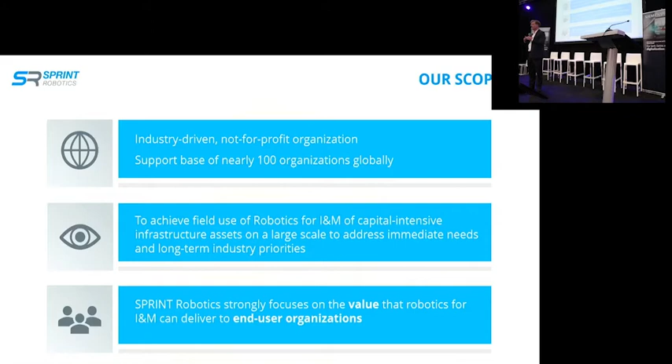I think one of the key success factors and defining features of SPRINT Robotics is that we are an end-user driven organization. That means we always start with the added value of robotics from an end-user perspective, and we're not interested in the technology per se. It's all about the added value that the technology can provide.

And that added value has multiple dimensions. Of course, there's the safety element in it. Hydrocarbons and people in their vicinity in principle are not a very good idea. So if we can take people away from hazardous areas, that will drive safety, and robotics can play an important role there. In the front of everybody's mind these days is also environmental performance improvement by doing things more cleverly.

In this session there's also a presentation on on-stream tank robotics. If you can leave a storage tank in service, that will reduce the environmental impact of your inspection and maintenance program, and that is important these days.

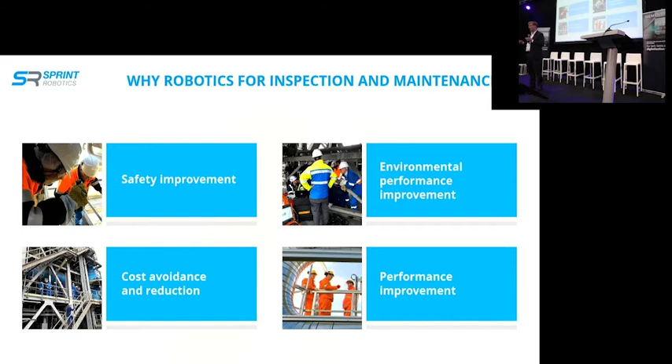And then, of course, there's the cost element of it, which has two components. One is driving down the cost of doing the inspection and maintenance in the first place. The other element is the increased uptime of your assets, which will result in more availability and thus more added value out of the assets that you have.

Many of our support organizations, more support companies, are global oil and gas majors and terminal owners. We decided that since this is a global industry, we needed to be global.

So very soon after 2015, we started to expand also to North America. So we have a North American chapter. We have an Asia Pacific chapter these days operating out of Singapore. And we are at the cusp of opening up also a South American chapter, which was supposed to happen in 2021, but due to COVID, it was delayed by a year.

This picture is sort of central to the way we look at how you drive robotic implementation. The only way to accelerate it is if you get alignment in the whole value chain. Simply put, there needs to be a business case for everybody involved in the implementation of robotics, because if one of the actors in the value chain doesn't have a business case, then basically your implementation breaks down.

So we've put this picture together to give you a bit of a feel for how that works from our perspective. We start from the right-hand side, which is the end users, who actually have the actual needs for robotics and for inspection and maintenance. But they outsource most of the work to service providers, who in turn are dependent on technology providers to provide them with the technology they need.

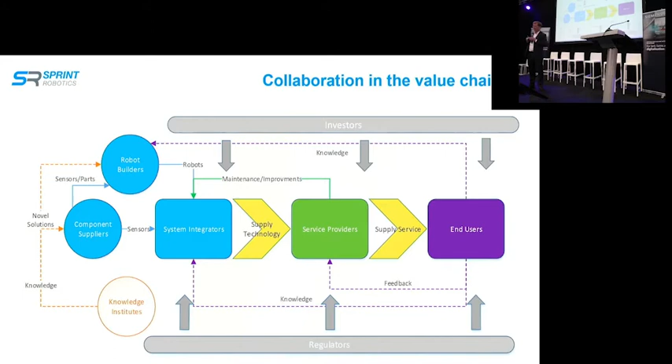For instance, if you're flying drones, there are regulations you need to comply with. There are all sorts of safety regulations, and technical standards you have to comply with. So the whole regulatory field is important, and the better we can get the message across to all actors in the value chain, the more rapidly we'll be able to make the change.

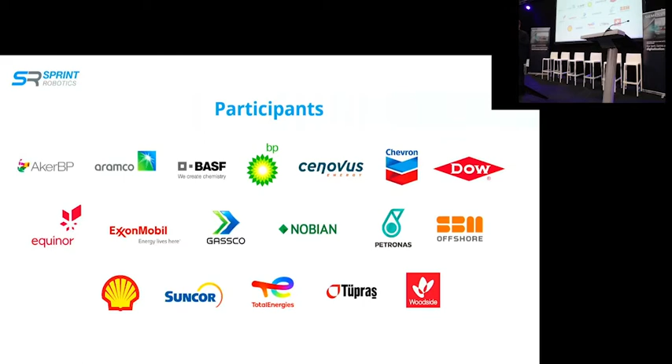So we do it with our full participants, mostly oil and gas majors who support our organization and drive the agenda. They are the ones who decide what we spend our resources on. Then we have a very large group of technology and service companies, about 80 of them, that make use of our services and our networks to help accelerate this. I think this is really a matter of raising the tide for all of us, so that robotics becomes a base case and not the exception it often is.

So what do we do? We're really focused on the deployment side of things, not so much on over-the-horizon research. Our working areas are really about how we can get robots accepted and usefully applied. That means we do it on an asset-focused basis, not with action groups around drones or ground-based robots or something like that. No, we focus on certain types of assets.

So we have the action group around storage tanks, which thinks about useful applications for robots in storage tanks, whatever they may be. We do the same for pressure vessels and process piping, and then we have a group that focuses on what we call remote operations. That covers applications where you want to do surveillance, inspection, or maintenance tasks without humans in the loop, doing it at minimum in a remote-controlled way.

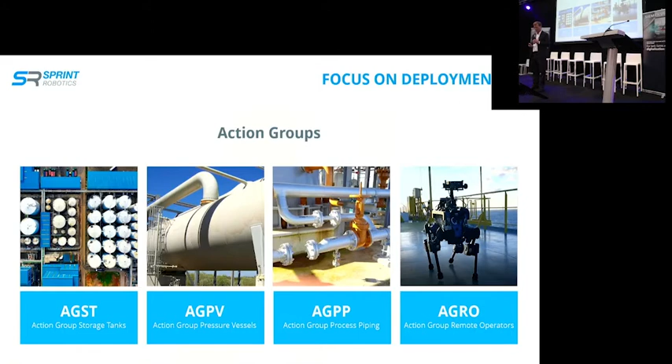But often also in automated ways, and that's where the new generation of spots and quadrupeds now becoming available play a role. Then there are some new areas where the capabilities of robots are becoming so strong that we felt we needed a special focus. One element is the cleaning and fabric maintenance side of things.

Robotics started very much in our industry as devices that collect data, almost like roaming sensors. But we see more and more that robots are becoming capable of actually executing tasks, which in the manufacturing industry is what robots have been doing from day one. On the service side of things, that's only now coming into its own, with cleaning tasks, coating tasks, and those kinds of things.

Clean energy, of course, is on everybody's mind. The margins on clean energy production are way off what they are in the oil and gas industry. So we see that industry becoming highly efficient in executing inspection and maintenance at a much lower cost. We'll see more of that in the oil and gas industry too, in our opinion, because those funds will have to be used for clean energy initiatives as well. So clean energy is certainly something very much on our minds.

Funding, as I showed in the diagram, is really important. And of course data is front and center to everything we do. So we're also looking into what AI can do to help us in this respect.

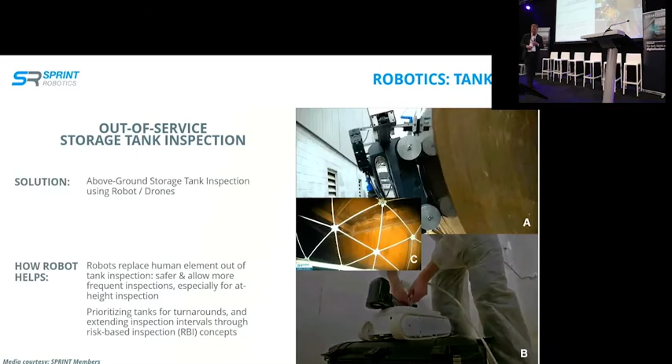So then very quickly, because there's in this session also in-depth presentations on these subjects, some applications that come to mind when we're thinking about terminals and tank storage.

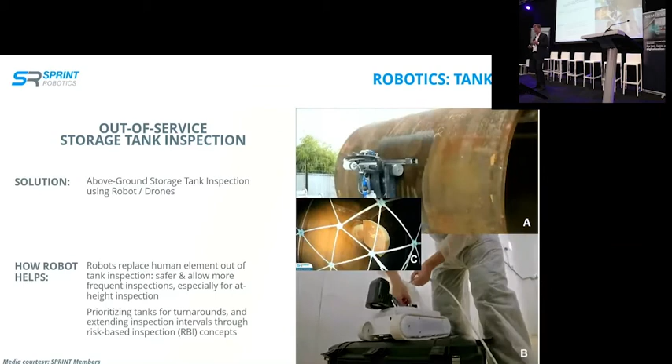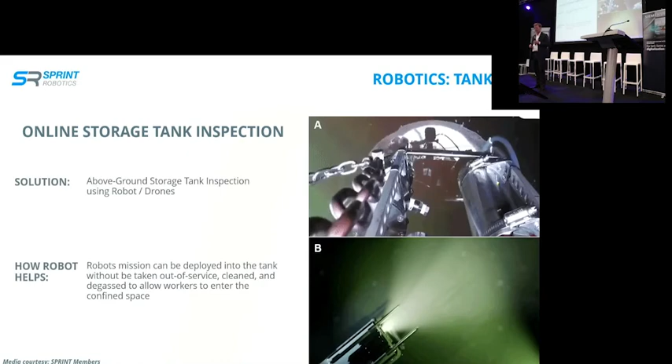Of course, there is opportunities in out-of-service tank storage inspection, so you can further automate the inspection of a tank while still taking it out of service. But if you really want to have a step change in the way you approach tank inspection, then online storage tank inspection comes into view. For a certain subset of tanks, this is now very well possible.

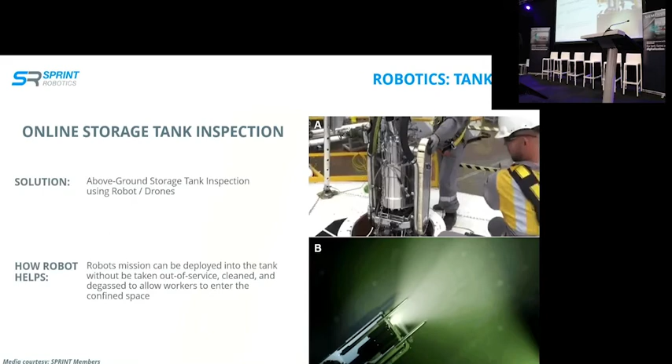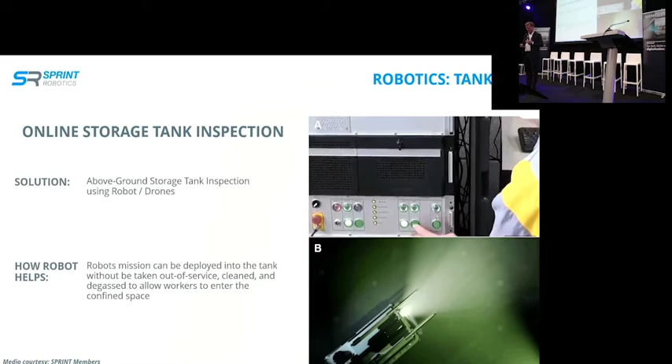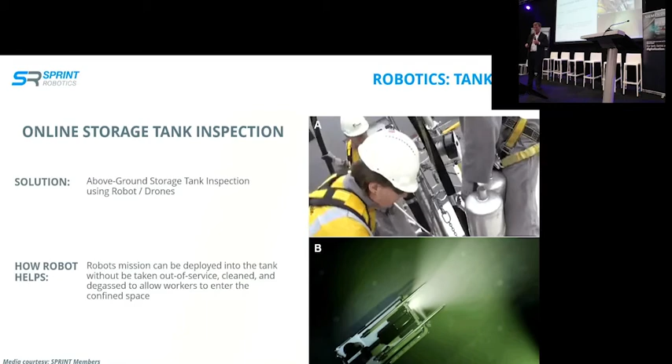But of course, this requires also a different approach to inspection, and I think there's quite a healthy landscape of service providers now out there that can actually provide this kind of services. It's really a matter of creating more industry uptake, and I would encourage everybody to look closely into the advantages of on-stream tank inspection, because it is really a game changer, and I'm personally convinced that this is the way that tank inspection will happen in the future.

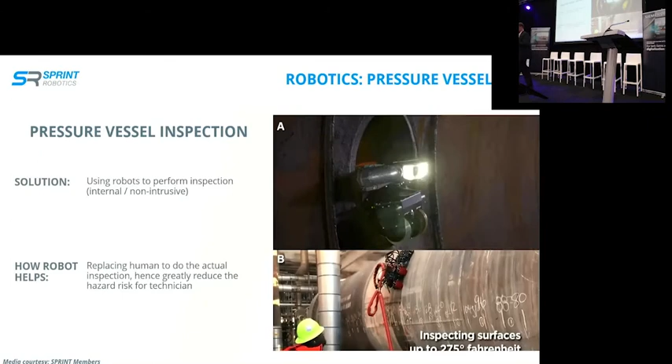Robotics for pressure vessels, there's also some presentations later on that. Sending people in confined spaces is a bad idea. We do it nevertheless in the industry on a very regular basis. Robotics can really help you pushing down the number of confined space entries, and thus make our industry safer, more efficient, and also robots in general do a better job at collecting information than we humans can.

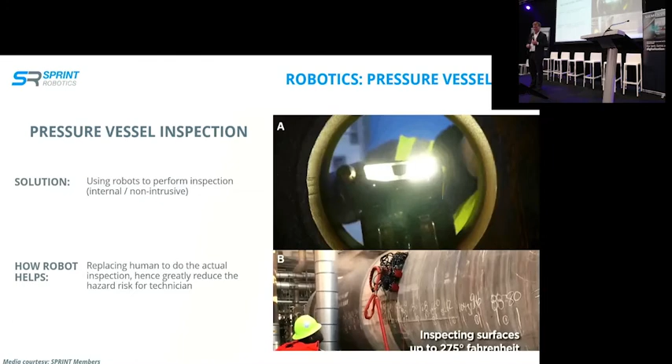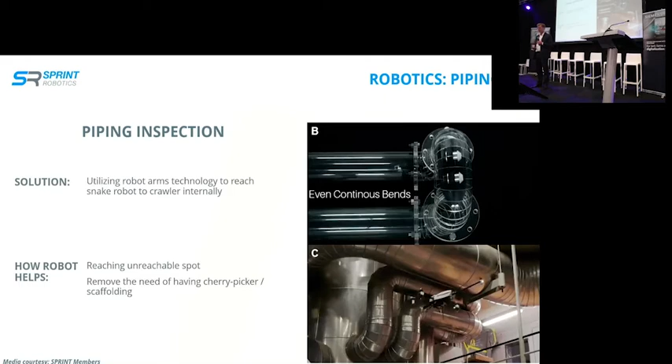And then, of course, there's a lot of piping in tank terminals in general. So piping inspection, there's a whole series of drones that can do visual inspection, but also wall thickness measurements from the inside, from the outside. That's another area where there's a lot of development at the moment.

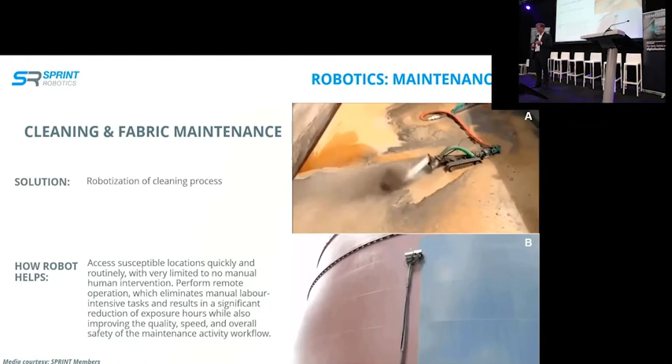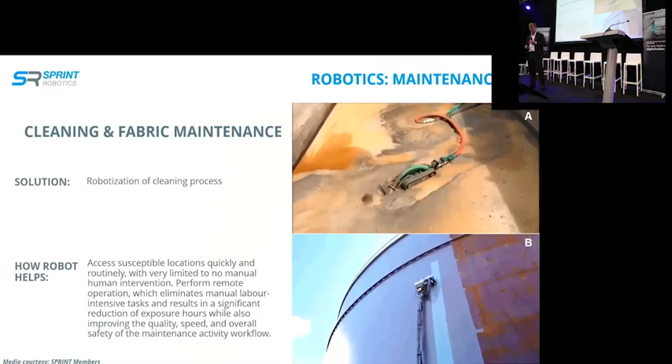And last but not least, I already said, we're moving from inspection to fabric maintenance. There's a growing fleet of robots that can do all sorts of cleaning tasks in very unfriendly environments, but also, for instance, blasting and coating of tanks. And yeah, that's really taking off, and it's a very efficient and high quality way of doing things.

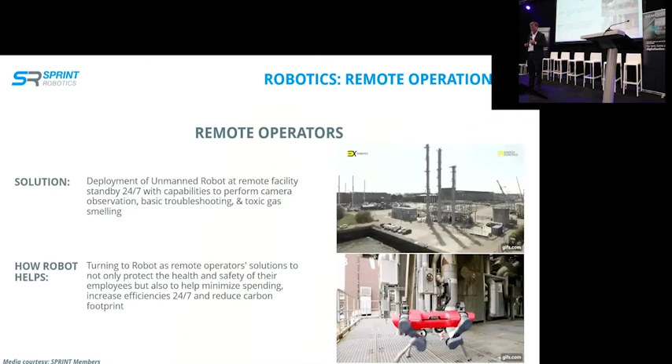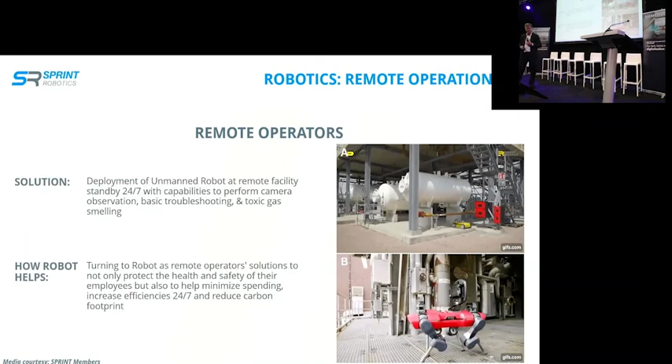And then finally, the remote operators that either come as drones or as quadrupeds or as wheeled vehicles. We see a lot of development there. So instead of doing operator rounds, send robots around as a roaming sensor to do surveillance and inspection tasks, keeping people out of harm's way, but also having a much closer surveillance of your environment. This is really starting to take off now, and there's a good range of robots, some of them ATEX certified, that are now able to do these tasks.

So what are the trends? Before I slowly come to the end of the presentation, I'm not sure how I'm doing on time, but when we started the organization back in 2015, it was all about how do we get robots available that are fit for the job they were designed for. In the past 7 years, that has really changed. There is now a very good range of robots that are really fit for purpose.

Some of them you can see around on this exhibition floor. So the momentum or the attention has really shifted from now we have these robots, how do we embed them in the workflows that we actually have in our day-to-day practice. And that is sometimes very painful because to effectively deploy these robots, we really need to operate in a different way. So we need to change our practices, and as we all know, our industry is quite conservative in that respect. So that's a big task to get done.

So scaling is very important. A robot can be technically capable, but if it's not available in the area where you run your operations, it doesn't do much good to you. And for day-to-day deployment, you really have to have a local ecosystem of these robotic service providers.

And then we see that there's more and more software becoming available to do robotic fleet management. So where up till now it was really somebody operating one robot, we now see more and more that whole fleets of robots are starting to be deployed, and they are controlled from a central location, which sometimes can be very remote from the area where you're actually deploying the robot. So those platforms are becoming more and more mature, for robotic control, but also for collecting all the data and making sense of it so that you get value out of it.

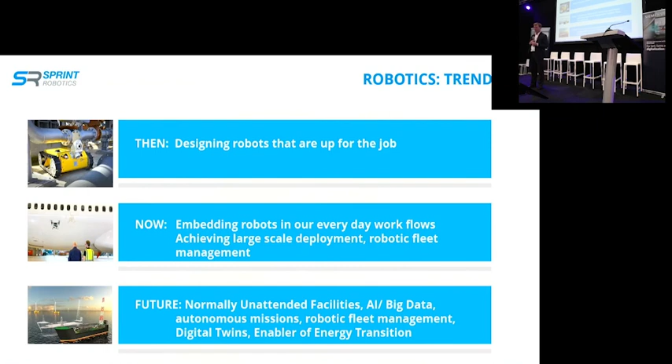And last but not least, it's really also becoming an enabler for the energy transition in multiple ways. In the legacy economy, in the oil and gas related economy, it's really a driver to further reduce costs. And many companies are now starting to invest in renewables, and renewables is not just wind turbines and solar panels, that's also synthetic fuels. Hydrogen economy is going to be very important, so we'll see a large impact of robots also in those kinds of applications.